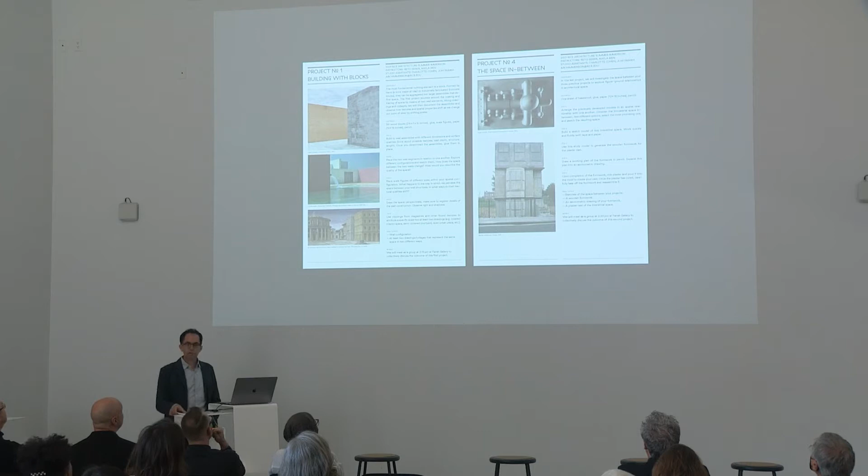The summer immersion is organized into a set of 4 assignments. We basically do one each day, and then the last day we work on documentation. Each one is dedicated to one way of making space. There are clearly many more, but that's just sort of a way in.

And the course takes place here in the school, in an actual studio space, so that the participants really get to experience what it means to be immersed in architecture school life.

They receive ample feedback, direct feedback, a lot of that also directly from a group of our own students, grad and undergrad, who work as teaching assistants to provide important insight, not only on architecture, but also what it means to study architecture, what it means to apply to college. Sort of important first-hand experience that comes directly from our students. And in return, I think this is also a valuable teaching opportunity for our students to get exposed to what it means to be on the other side in the classroom.

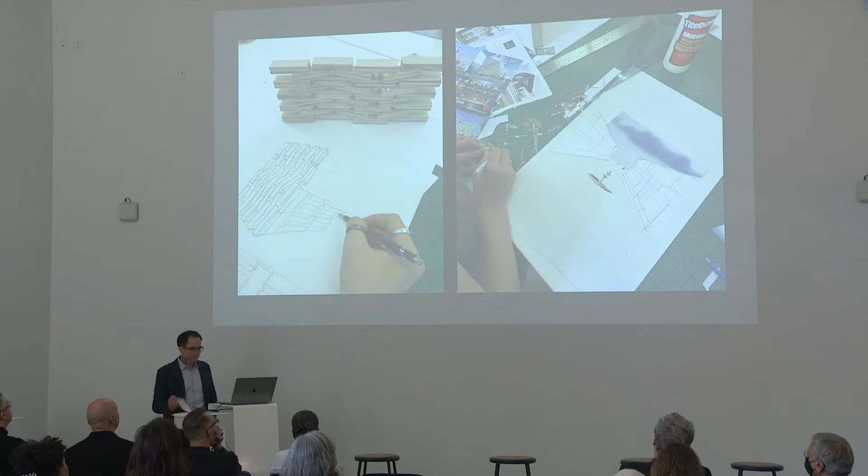We work with basic elements, building blocks that we aggregate into objects of various qualities, set in relation, working with different scalar relationships. We work with plates and sticks. We explore different ways and means to create an envisioned space.

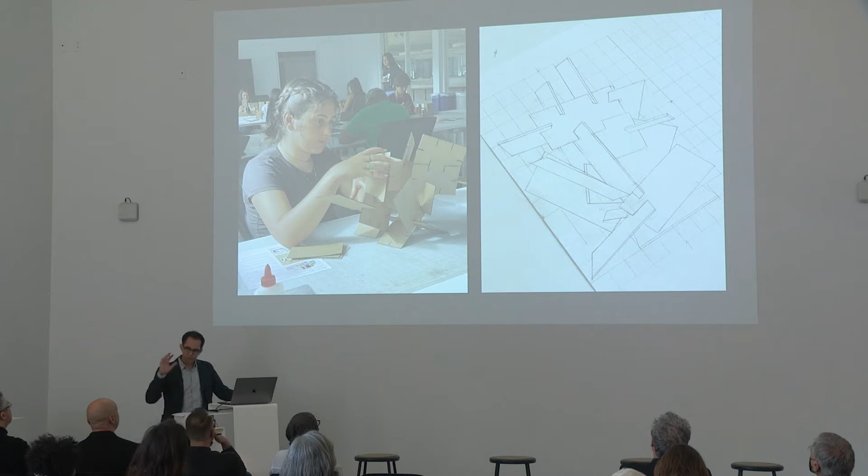And as we move forward within these only 4 days, there's a sort of progression of complexity. Many of the assignments are set up in a way that they're also open-ended, so students who are interested can continue working on them at a later stage.

But then throughout the week, we also have some fun. I mean, not that architecture isn't fun, but just other kinds of fun. They get to experience college life, which is interesting too. Many of them at that point realized that Rice is actually an option for them. Many of them didn't even consider applying to the university.

We introduce students to basic forms of orthographic projection, perspectival drawing, various different types of model skills, and they learn how to use drafting tools. Sometimes the pedagogy is super direct, like here: you cut an apple apart and you start to understand what a plan or a section is.

And they quickly learn and progress, drawing things within days that are pretty amazing. And every once in a while, again, we break out and do field trips. We visited construction sites, conveniently on campus.

We had presentations from the teaching team that presented their own projects, and we had evening lectures with colleagues from the school and practitioners from the city who talked about their work and their experiences in architecture.

The amount of dedication by the students was really inspiring. Sometimes it was hard to get them even out of the studio for food in the serveries. Maybe that was the reason why.

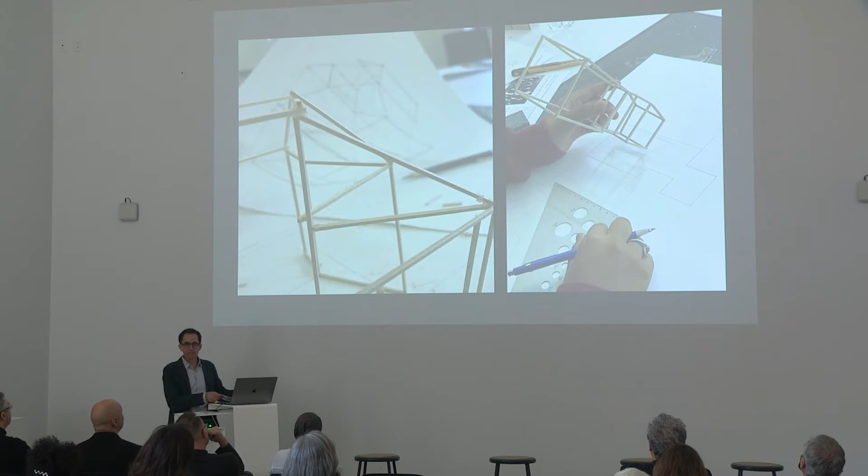And over the course of the week, they really became more vocal, empowered. I think, as this image really beautifully shows, they became really confident in talking about their work.

And then we basically wrap up the week here with Paul Hester, focusing on documentation, showing them how they can document their work. That documentation is an equally important part of what they have to do.

And we also basically teach them how to make their work look good, and how to do that not only with photographic equipment, but also just with your cell phone and a piece of white paper.

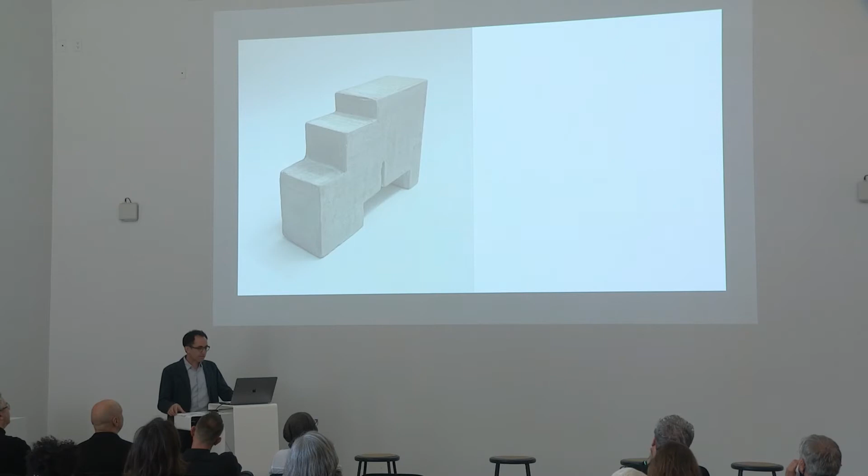And so on a daily basis, the participants of the workshop had to present their work. That's an integral part, to take pride in what they do, get comfortable speaking to others about their projects, and learn to articulate ideas. It's really amazing to see how far they got within no time.

And that then culminates in a final presentation and celebration of the work, including a public presentation, also in front of an invited group of academics and practitioners friendly with the school, who provided really valuable feedback for the students.

So that's essentially how that week roughly works. And I'll just shift very quickly to two more things. This coming year, we want to do some work on looking into spatial reasoning.

Spatial reasoning tests are used in engineering to assess prospective students' capacity to read, comprehend, visualize, and manipulate 2- and 3-dimensional shapes. This capacity is equally relevant in architecture, and for us, the design portfolio is typically what we use to assess those qualifications.

There are several standardized tests, roughly like this, used in engineering schools across the country. Students typically have to take an entrance test, and if they don't pass, they have to take additional classes, which tends to separate out and discriminate a particular set of students. Next summer we will test our summer immersion participants as they come in, to see what progress they make and how they perform at the end. We're particularly interested in how our program's pedagogy compares to the standardized and far less hands-on, and far less fun, modules currently used in other fields. We also hope to learn more about the reliability of such assessments for our own disciplinary purposes.

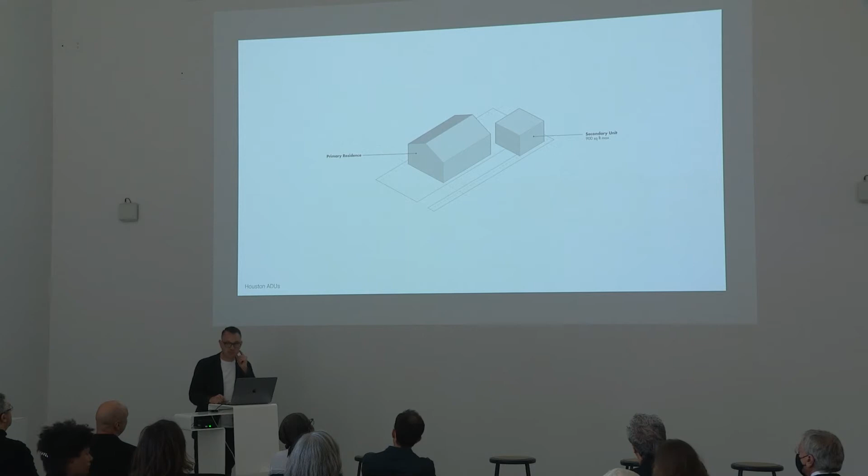Five years ago, Construct completed its first accessory dwelling unit, a single 360 square foot dwelling for two separate people. The project was prompted by the need for a local organization to house two counselors next door to an at-risk youth program. An accessory dwelling unit, or ADU, is simply a second home built on the same lot as a single-family house. This type of housing was outlawed in many US cities during the 20th century, but ADUs have always been permissible in Houston. Building on the success of Plus House, we began a new phase of research focused on the ADU.

At that time, ADUs were just starting to attract attention. Portland had recently made them legal, and California was in the process of trying to enact similar statewide legislation, which passed in 2019. Many cities in the US have now repealed bans and are even incentivizing ADU development. These efforts are in response to the compounding and interrelated crises of housing and climate.

Accessory dwellings, by their very nature, may seem inconsequential, but consider a simple thought exercise. The Houston metro area is comprised of over 1.5 million single-family homes, of which just over 5,000 are thought to have an accessory dwelling. Building an ADU alongside each home could house well over 2 million people and accommodate Houston's expected population growth through 2030, all without a single new road or greenfield site.

Of course, to do so may double down on some of Houston's long-standing ecological and social problems. Our aim has been to demonstrate what kind of ADU we might build, and how we might do so more thoughtfully. We've now completed a series of five research projects.

Each began by asking students to design a prototype that addressed the unique challenges and potentials of the ADU within a particular thematic. The auxiliary project, for instance, which just concluded and that I'll share with you today, looked to create an ADU that was net positive in energy use.

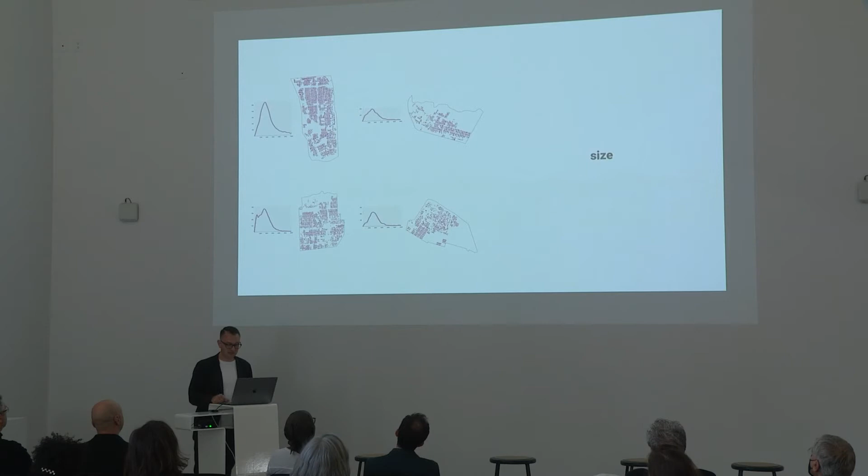By analyzing specific sites in aggregate, we can better target the reality of real-world conditions, designing an adaptable type of dwelling rather than one idealized to meet an assumed standard. Doing so increases viability, but can also improve performance.

Solar energy production, for instance, is highly dependent upon site orientation, which in turn varies significantly across even this small sample set. To address these broad concerns, each project investigates computational strategies at the urban scale to analyze and test prospective ADU designs, and does the same at the building system scale, utilizing computer-controlled fabrication and assembly processes that permit efficient methods of non-standard production.

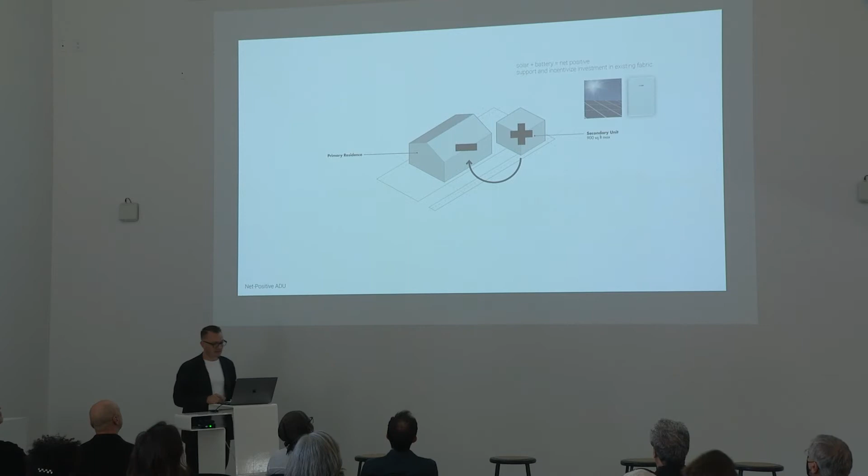To put that in context, the auxiliary project, which began in 2019, looked to examine the ADU's unique potential for sustainable energy production and use. The project's basic concept was straightforward: to build a prototype net positive ADU. Along with minimizing energy use, we would pair solar generation and battery storage. In principle, any extra power generated could then subsidize the primary dwelling.

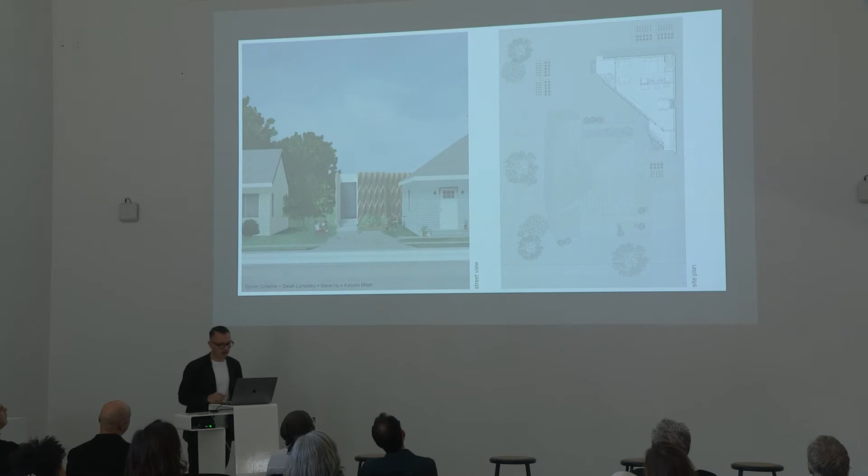In this project, for instance, a group of students proposed a triangular ADU, efficiently inhabiting the rear corner of the site with entries to the driveway and side yard, and with an angled wall fronting the primary dwelling for privacy. They then built a parametric model, testing, iterating, and refining the type to maximize its viability and automate its design application across all 19,000 sites.

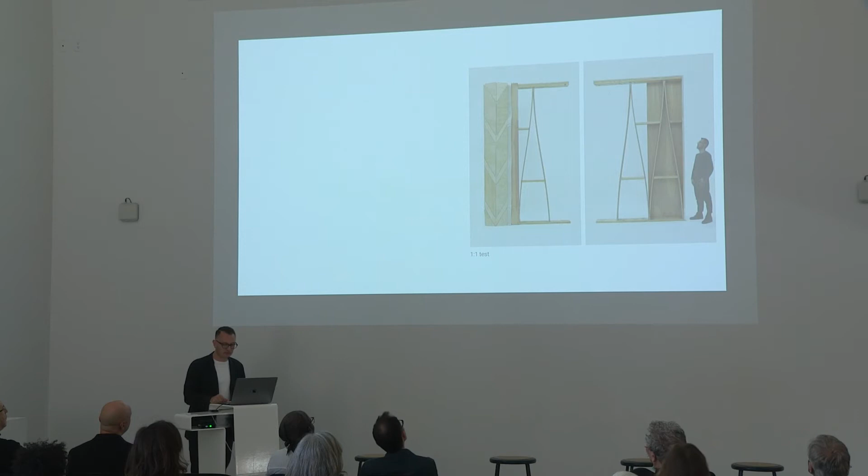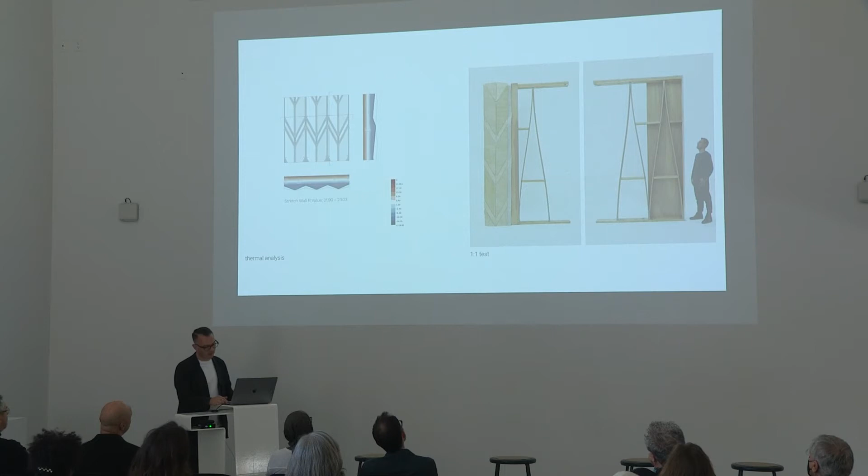In parallel, the group proposed a novel means of wall construction, an accordion-like system of stretched studs that could be deployed at variable lengths, and a faceted self-shading system of cladding culminating in a full-scale mock-up of the system. They produced a thermal analysis of their proposal and incorporated it into a full energy model of their project.

Students in 3 other groups completed a similar process, and the results of their energy models were compared. While all outperformed the control, one project was predicted to use 75% less energy and was selected to advance.

The project made use of a form similar to that of a well-known historical type, a dog trot, which separates interior spaces with an exterior porch through the depth of the house to maximize passive ventilation.

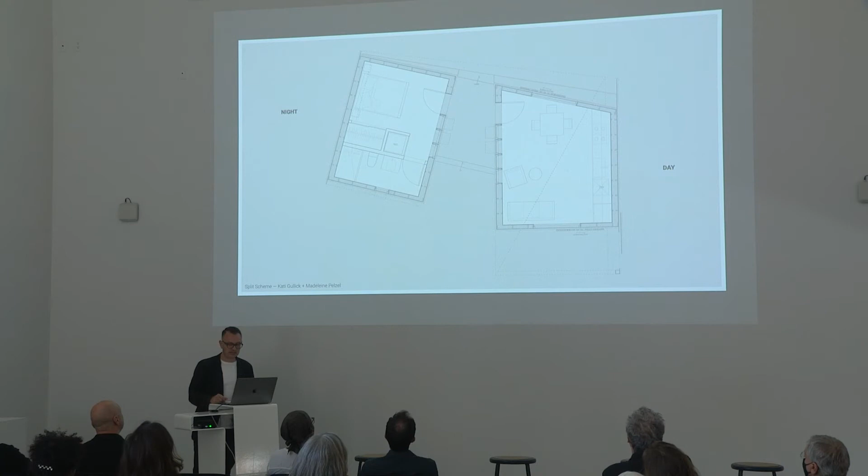While the internalized porch functions similarly in the student's project, more importantly, it separates day and night functions into separately conditioned volumes, living, kitchen, and dining in one half and bed and bath in the other. The approach allows the conditioning of the 2 volumes to vary, tailored to occupant use.

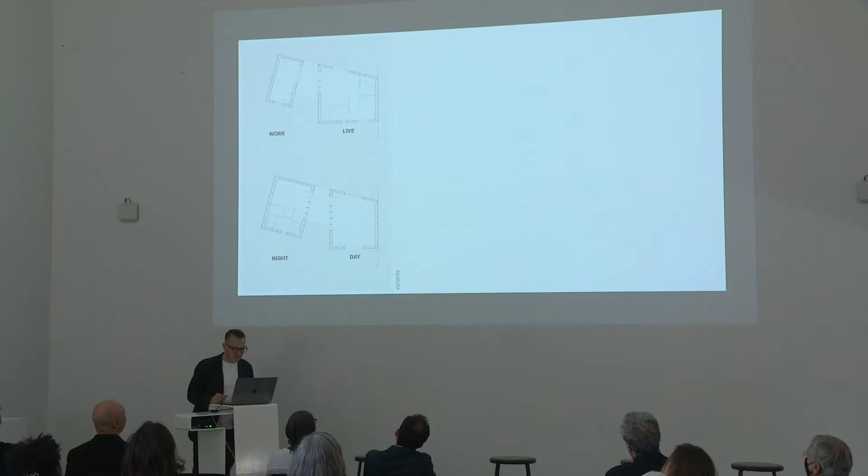While the inhabitant is asleep, for instance, the kitchen volume can be conditioned for optimal overall energy use rather than human comfort. This approach allows the conditioning of the 2 volumes to vary, tailored to occupant use, and the logic extended to variations of the type, a work-live separation, for instance, rather than day-night. And again, was optimized across the range of potential sites.

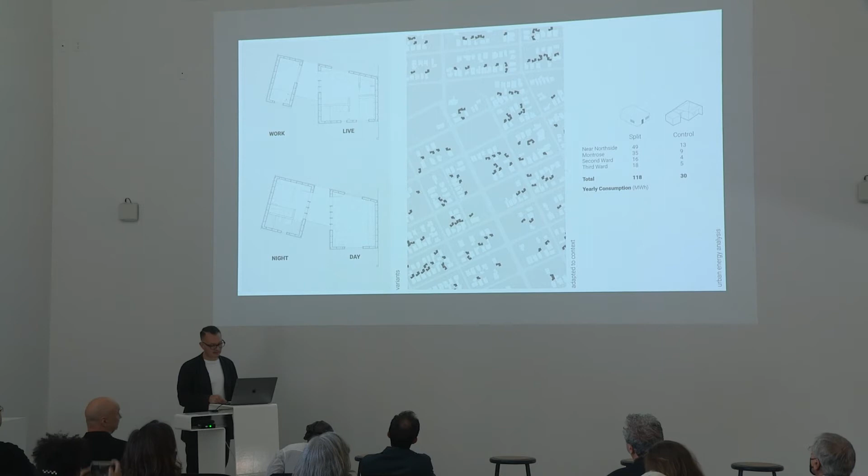And concluded by linking the energy model and urban analysis together to understand the scale of impact such a project might achieve.

Alongside the project's unique spatial configuration, the students developed a portal frame system that integrated standard lumber with CNC cut plywood plates. The approach creates a double stud and rafter system, more materially efficient in structure and more insulative, while aiming to shorten on-site framing and ease assembly of more variable solar-optimized roof angles.

With concept in hand, we engaged Avenue CDC, a local nonprofit that provides affordable housing, with an offer to partner and realize a demonstration project.

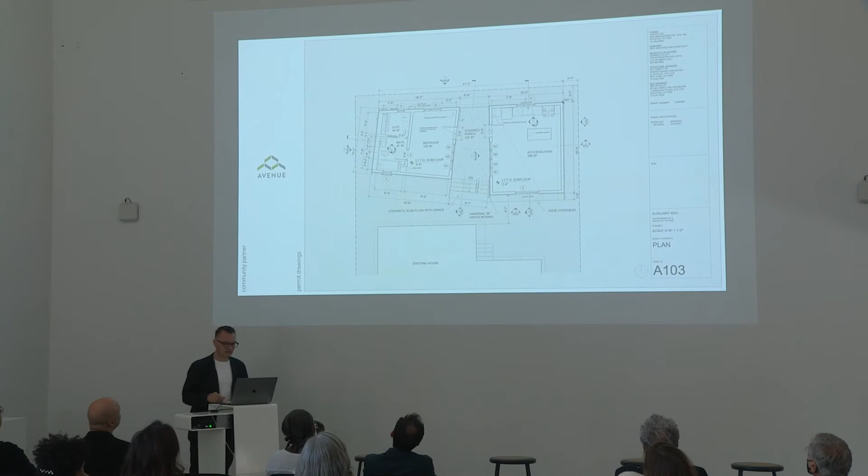Avenue's proposed site at the bottom left included 2 bungalows and an existing ADU from the 1930s, all historically protected buildings and affordable rentals. After a semester with students developing construction drawings and a summer spent permitting the project, construction with students began in the fall of 2020, with work beginning on campus at the onset of the pandemic.

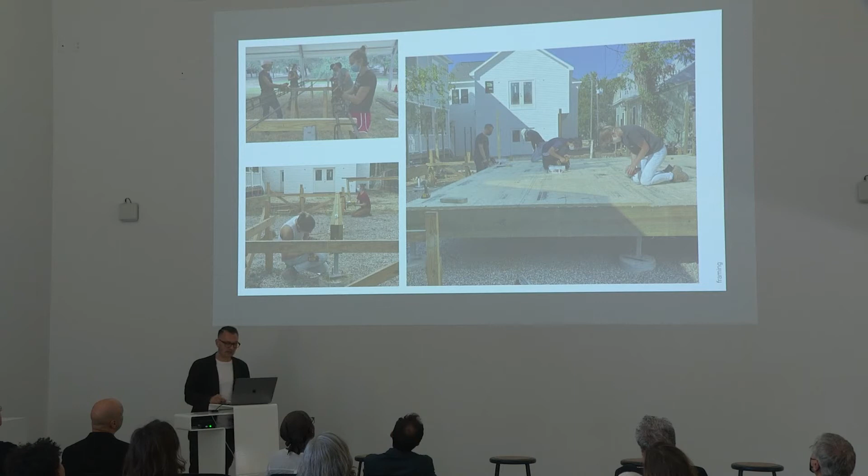That fall, a group of a dozen students worked to complete foundations and framing. Here at the top, you can see one completed set of portal frames, including the CNC plywood connections, and at the bottom, the 2 principal volumes underway.

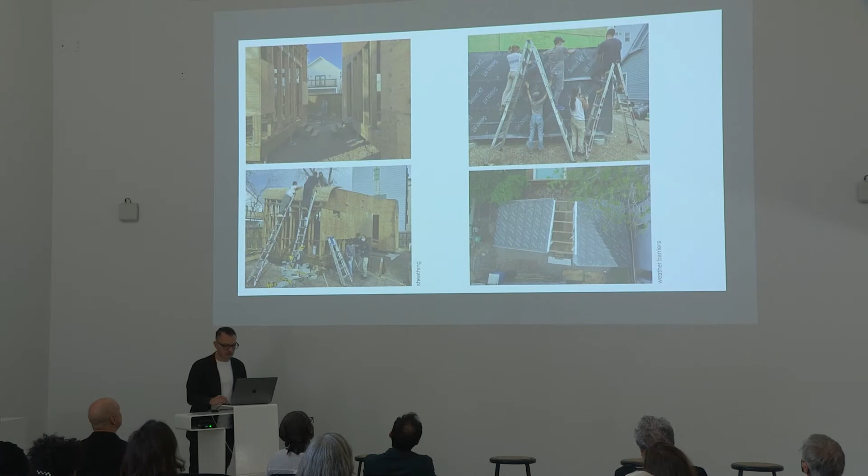Sheathing, installation of weather barriers, windows, and doors continued into the next spring with a new group of students. Roofing and cladding was completed mostly over the following summer. A portion of the MEP work and the solar and battery systems were completed by contractors, but the vast majority was completed by students, along with myself and my co-director, Danny Samuels.

Last fall, a final group of students completed the interior finishes, painting, caulking, tiling, and the project wrapped up with an opening this past spring.

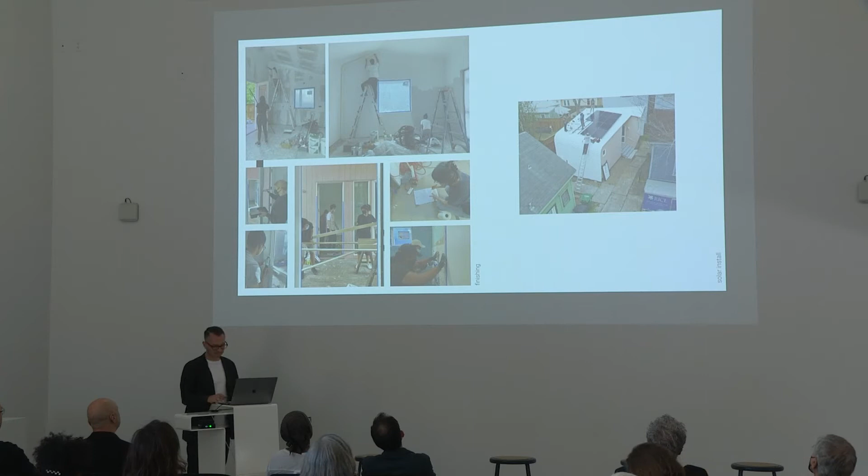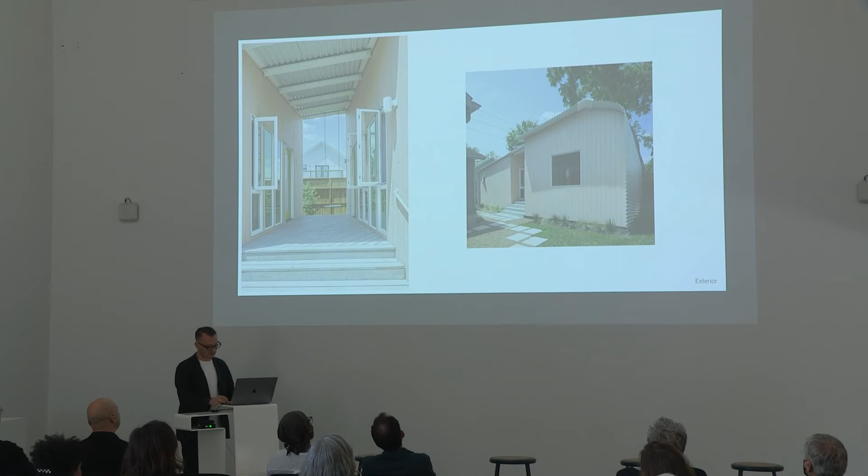While the net positive energy aspect receives the most attention, it's important to note that it's not the most significant benefit of the strategy, because few things are less sustainable than the common practice of demolishing a single-family home and replacing it in kind. Building a new house to replace an old one, even if it were net positive, can take decades to offset the embodied carbon lost from the original.

This is just one important takeaway, and one that highlights a fundamental aspect of ADUs. The vast majority are additions to existing homes. In this way, ADUs are best understood as a form of urban renovation, a means to augment the urban environment toward greater resiliency, and often with a lower environmental and economic cost than wholesale replacement.

In all, 63 students worked on the project over the course of 5 semesters and 2 summers. Today, it provides a home rented at 80% AMI, and we've made arrangements to track the energy usage to evaluate its performance for future research.

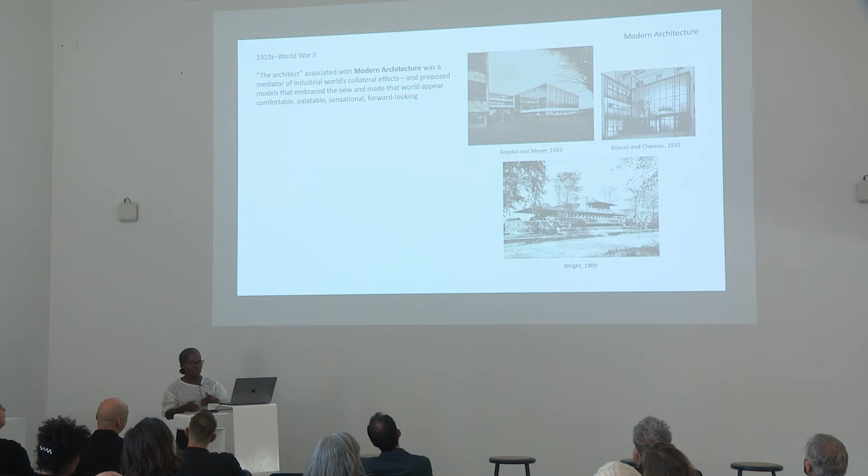The role of the architect in those examples was essentially as a mediator between material logics and realities and the modes of production becoming typical of industrialization, the use of the machine, and so forth. So we got beautiful projects like the work of Chareau, the Maison de Verre in Paris, the Bauhaus School with its wall of glass, or here in the US, Frank Lloyd Wright's Robie House with its dramatic interior organization, breaking from the traditional norms of building forms.

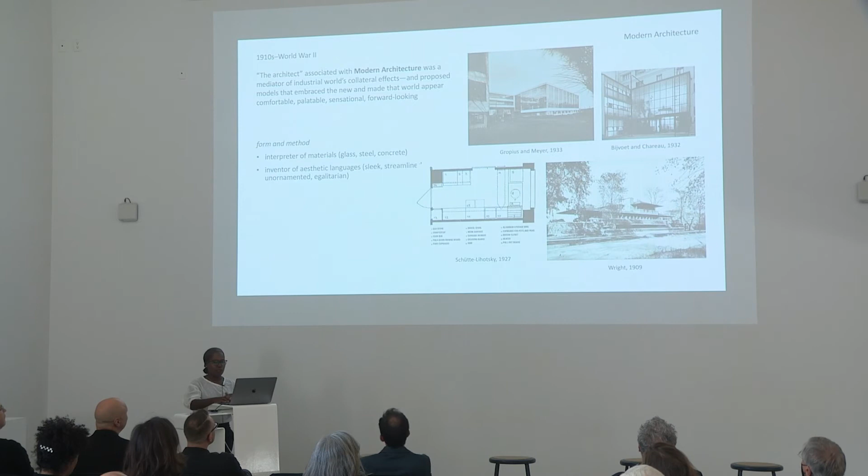There's an aspect to modern architecture that involved a method of design—thinking about function as a starting point rather than starting with typical forms, shapes, and symbols—and inventing ways of using materials that constituted their own aesthetic languages that began to make sense even though they were new, or space planning, as in the case of Margarete Schütte-Lihotzky.

At the same time, modern architecture was associated with a certain ethical attitude in which the architect concerned himself or herself with the status of the worker—the kinds of dwellings workers in European cities were typically offered. Architects like Ernst May, working with Schütte-Lihotzky who designed the kitchens, designed housing blocks meant to give, with efficiency of space, to house large numbers of people, to afford them a place to sit outside in the sun. They weren't just workers going to the factory and sleeping, but had a kind of life where they could take advantage of the goods of this new mechanized world, just like everybody else.

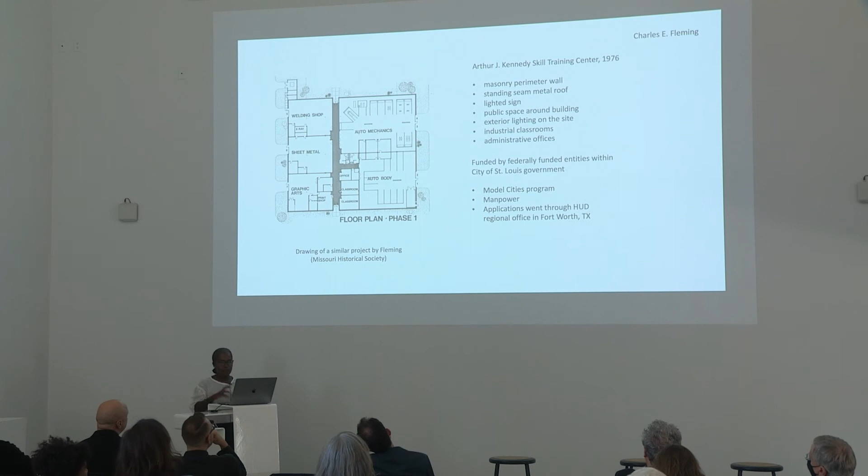But my point here is that it's a modern building. He's doing, in a sense, a modern form of modern architecture in a very earnest way, and it's set up in such a way that it reconfigures, in a sense, the distribution of labor and capacity around him.

It was closed in 1984 when the federal funds ran out. By that time, it was a very much loved local institution. Thousands of students had gone through it and gone on to get jobs. And in fact, when it was torn down some years after, in the 1990s, the local alderman and an activist staged a symbolic protest that got them into the paper.

I show that just because it goes to show how this work, which came out of the imagination of the architect in the context in which he made it, became cherished by the public, in a sense. So I'm reflecting on how it may constitute a successful model of modern practice in his time and in his place. Thank you.

Thank you, Reto, Andrew, and Shantel.

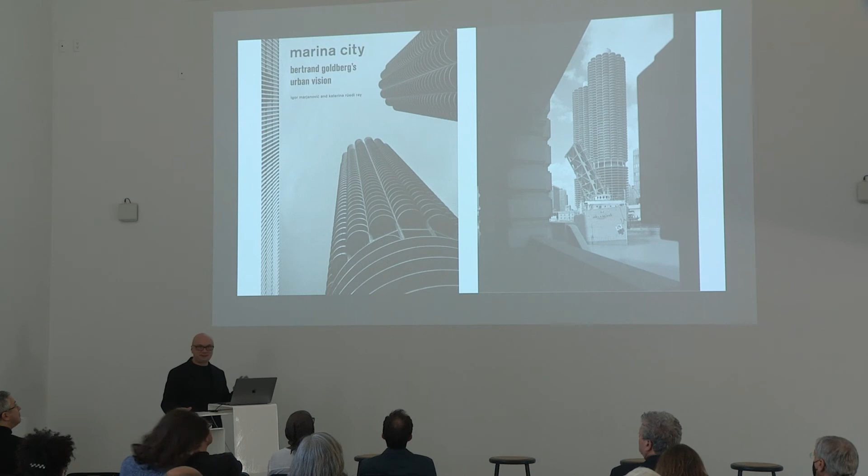And Shantel, in particular, I think the discussion of Charles Fleming is a perfect segue to just a little snapshot of my own research and work, which in this case I'll present briefly on the work of architect Bertrand Goldberg and his iconic Marina City project in Chicago, which actually has many parallels to what Shantel was just presenting. It's a collaborative project that I worked on with a dear friend and colleague, Katerina Rüedi Ray, that resulted in a monograph that was published on the project.

The project is significant because it was launched at a moment in time with a maybe very different context, but also maybe not too dissimilar to what we're experiencing today—at the height of the Cold War, great international tensions. This is a cover page from the Chicago Sun-Times at that time announcing both the famous Khrushchev tour of the US, where there was a fierce competition for consumer goods between the East and the West, and also the global space race, but also this particular project, Marina City.

Marina City was at that time funded with 25 million, a staggering amount to fund what was fundamentally the first mixed-use housing project in downtown Chicago, at a time when people were actually fleeing to the suburbs and the city was de-densifying and decentralizing. The architect, Bertrand Goldberg, is on the left, but he was part of a bigger team that also included William McFetridge, the skeptically looking person in the middle, who was the president of the Chicago janitors union.

Oftentimes people ask me who was the enlightened client behind such progressive circular towers. Actually, it's the Chicago janitors that decided to invest their pension funds in this project as a way to both make a good financial investment and contribute to the renaissance of the city of Chicago.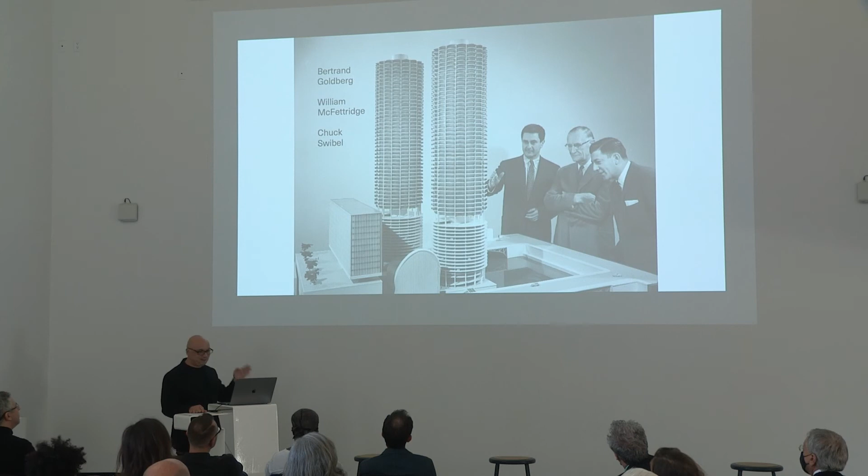Chuck Swibel, on the right, is more optimistic. He's actually a realtor, so obviously he's trying to make a deal and create a particular atmosphere here. In the book, Katerina and I discuss how, as an architect, Goldberg had to bring a series of skills to a project like this: to work innovatively with form and structure, to work innovatively with finance as well, kind of like Fleming, to understand trade unions and the flows of capitalism at that time, and to work not only with Swibel and McFettridge in the middle, but also Mayor Richard Daley on the left.

Basically, what he's saying is that at a time when everybody was fleeing to the suburbs for housing and office space, they decided to build this project as a way to put janitors to work. Goldberg, as an architect, understood that context, and also understood the importance of drawings and images to pitch this project to the public as a real project of change.

He even went to the FHA in DC to present this project to garner additional federal funding. Interestingly enough, he didn't present the two circular towers—he presented a very conventional rectangular tower, because he didn't want to risk any confrontation with the federal government.

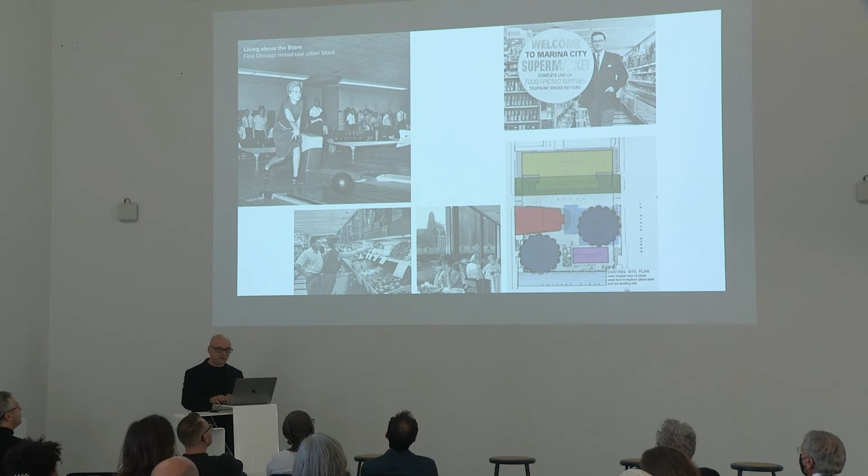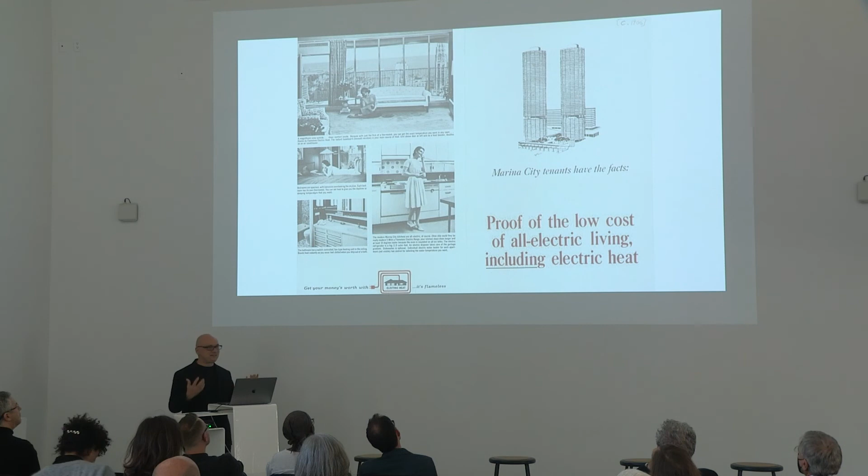At the same time, in this kind of space-age competition, he also argued that the project needed to be what we would call today sustainable and resilient—to use electrical energy rather than other types of energy, to make a more energy-efficient and affordable system of apartments.

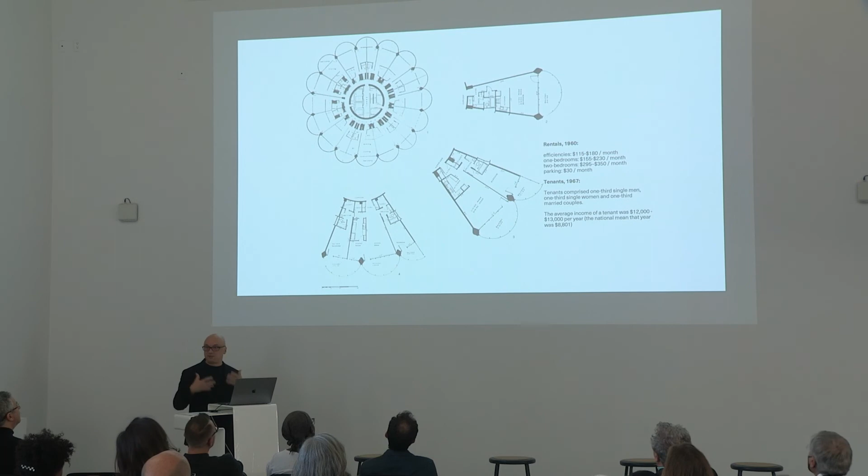These are the actual wedges of the towers, showing 2-bedroom, 1-bedroom, and efficiency units that are fairly modest and straightforward on the inside, but they all result in a really beautiful, spacious balcony, meant to compensate—what you don't have on the inside, you gain on the outside.

There's a whole number of savings achieved by the circular plan in terms of structure, the central core, and also eliminating some of the exterior walls, which results in more efficient energy conservation on the inside of the building, as opposed to energy loss, which is a big issue in Chicago.

What Goldberg really brought to the table was not only the understanding of energy, construction, economy, and investment, but also design skills, and really the sort of beauty and quality of drawing and bookmaking to convince the public of the merits of this kind of project.

Before the project was even built, at the headquarters of the Janitors Union in Chicago, Goldberg built a very interesting full-scale mock-up of one of the apartments, trying to convince not only the janitors but also the public of the beauty of urban living. The hardest issue was not only financial, but convincing people that they should stay in the city and that urban living is not only dignified but also beautiful. As a way to do that, they built this full-scale mock-up so people could enjoy and look at the view one would have from the imaginary 40th floor of Marina City.

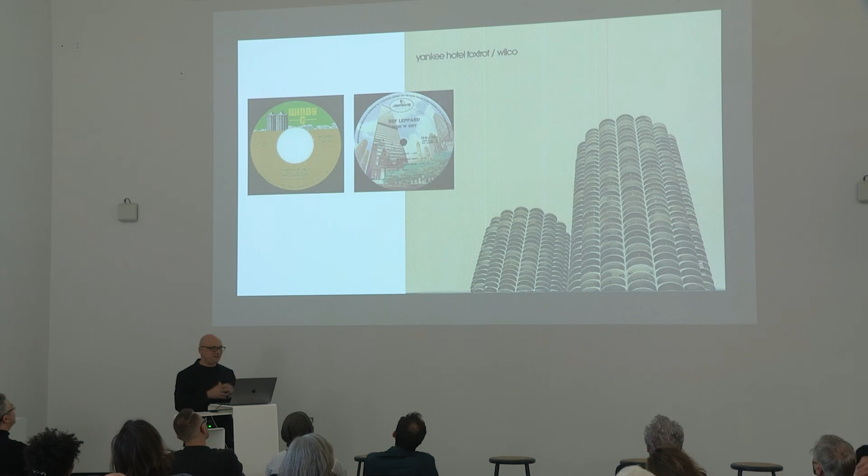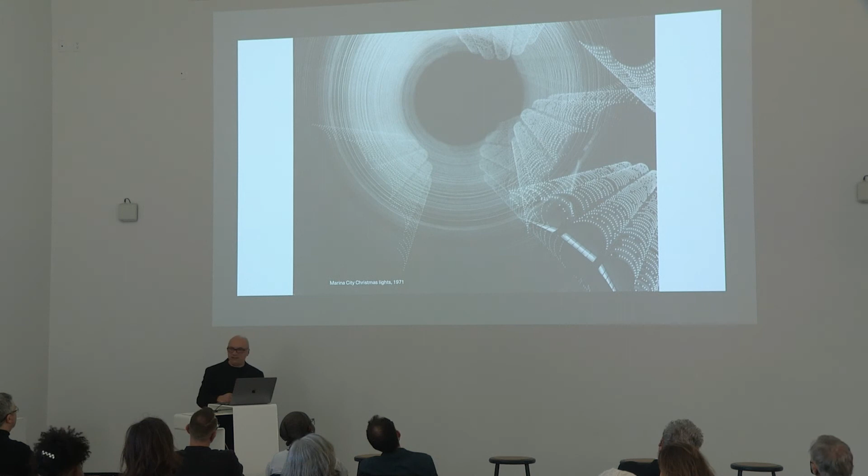Those kinds of things linger until today—this is now almost 60 years long. Marina City keeps reoccurring as an icon of urbanity, not only in Chicago but more broadly. I'd say it's the architect's skills to draw, to visualize, to make form, but also to understand how that form sits in the larger context, that gave the project its longevity.

In closing, I'd say many of those things come from education—they don't come in a vacuum. Goldberg was actually a student at the Bauhaus between 1932 and 1933, and for those historians in the room, that was the final year of the Bauhaus. He took, so to speak, the last train from Berlin as Hitler was seizing power, escaping to Paris and then back to the US.

1932-33 was a tumultuous year in Germany as Hitler was seizing power. One of the key guest speakers at the Bauhaus was Wladimir Woytinsky, who was president of the Association of German Labor Unions. He came to speak often about his experience with labor and trade unions in Germany, and his earlier experience during the Russian Revolution.

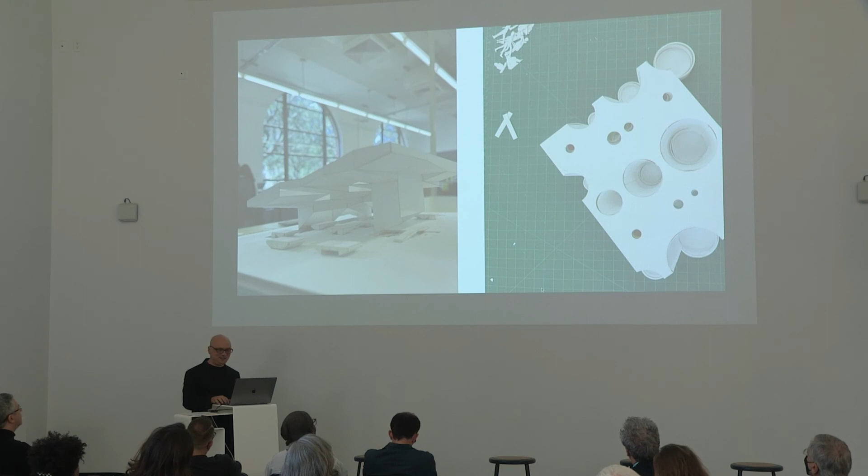These are some snapshots from our studios in the last couple of days—Dawn, these are your students in the introductory graduate studios. I like these images because they show work in progress. I hope you don't mind me showing work that's not fully cooked yet, but it looks beautiful, and it shows images of people and scale figures as we try to understand how the spaces we design, even on a small scale, impact the scale and experience of people.

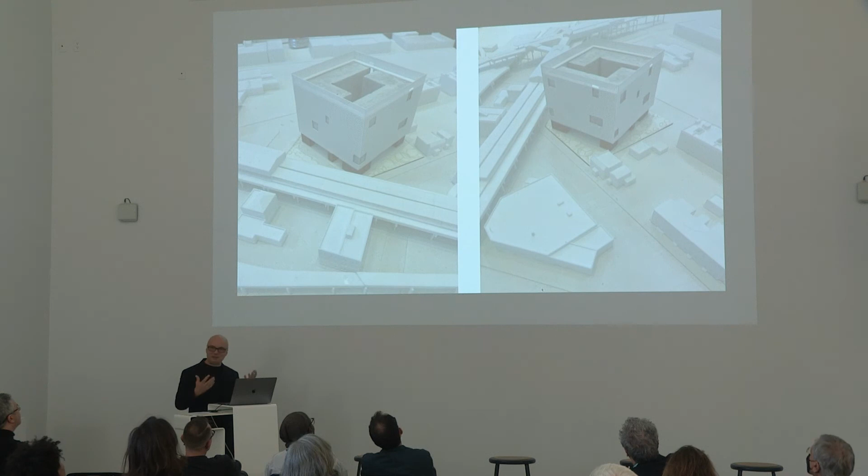A couple of images also from the yesterday's review from Adam Frampton's section, a mixed-use complex integrating different programs in New York—examples of that formal work, but also the conversation and debate that takes place around the work, which, as was said several times this evening, is an integral part of how we think about architecture. Again, making things, but also having a discussion and collective conversation about their importance.